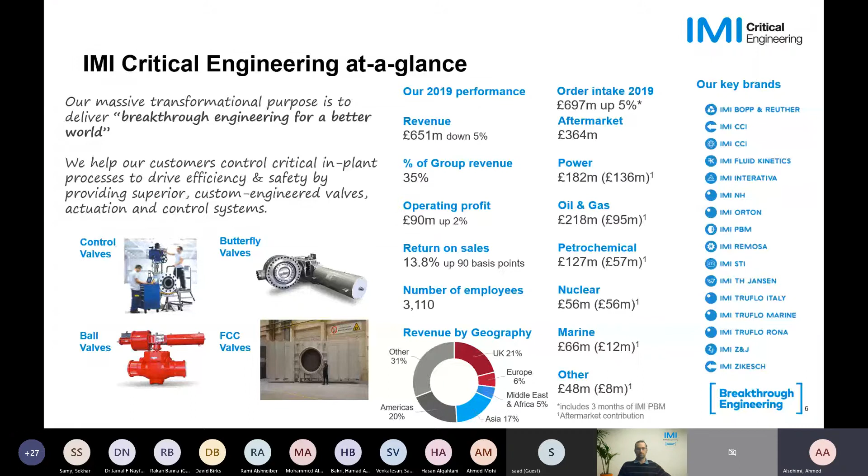Our branding, our key branding - we have listed our companies within the IMI group on the right hand of the screen: IMI Bopp & Reuther, IMI CCI, IMI Fluid Kinetics, IMI Orton, and so on. If you have any questions, we can answer them at the end of the session or after my presentation.

Time journey of the company. IMI is established in the 1800s with a history spanning the last century. IMI CCI joined the group in 1981. We continued acquiring some big players in the market - in 1997 we acquired Sulzer Valve Technology in control valve, also BTG in 2001.

Up until 2006, we were only in the control section. In 2006, we acquired IMI Orton, IMI Truflo, and IMI Truflo Marine, which is in the isolation business. We continued acquiring and expanding our portfolio to cover and support our customers around the globe.

Lately, we have our venture in Saudi. We established IMI Saudi Industry in 2020, this year, and the project is ongoing as planned.

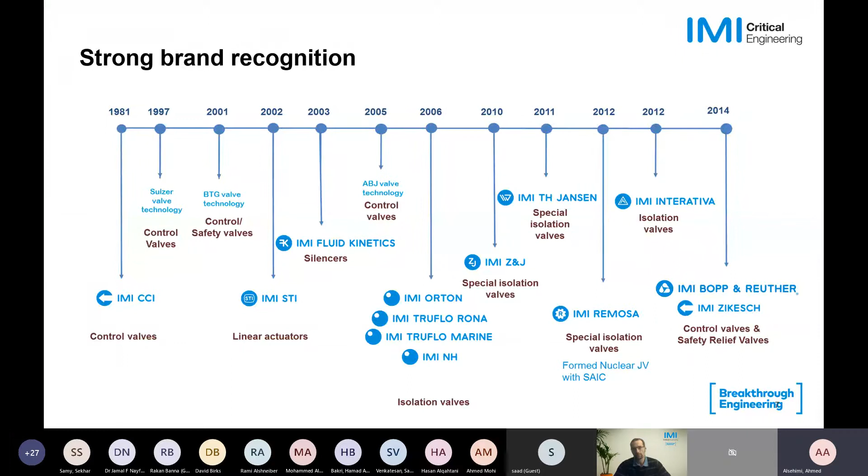In terms of our people and growth, we have what we call a doctor program, or valve doctor program, and in light of our vision, because our product is critical, we have this program to create subject matter experts to support our customers and solve problems.

We also have a growth accelerator program designed to fast track growth within our division, putting our talented colleagues at the heart of our business challenges. IMI is also taking the initiative in inclusion and diversity among our 3 divisions and in all positions.

Just a quick update on our venture in Saudi. We have planned to have a 20-ton lifting capacity in our plant in Saudi. To support our customers, we need to invest in high tech, so our factory will be able to handle 20-ton valves.

We also target up to 56-inch size. We will also be having API 6D and 6A certification. The plan is to have this facility ready by early next year.

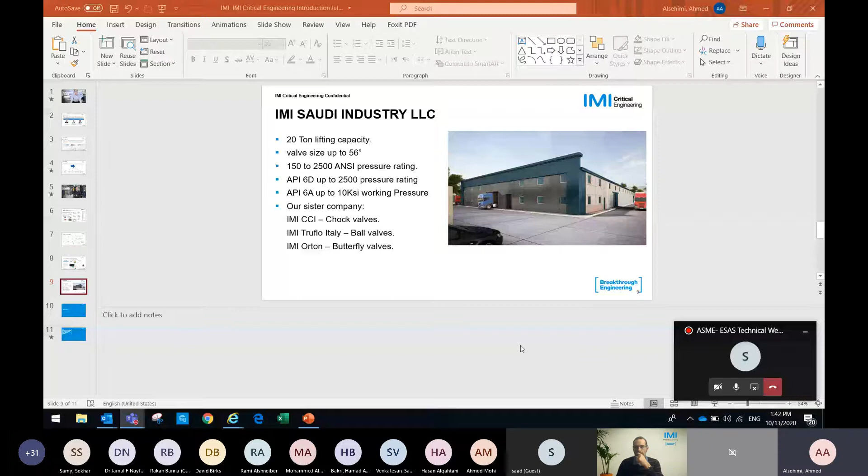Yes, no, we hear you clearly. Thank you very much, we appreciate this brief introductory about IMI.

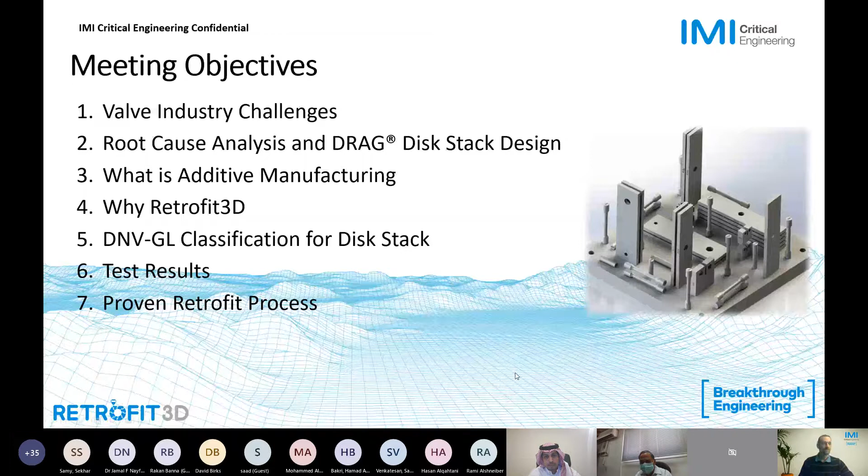And I will let Sekhar Samy introduce himself when he will take over his part of the presentation, but we'll jump right into the most exciting topic, which is control valves.

So you might be familiar with control valves, you might not be familiar with control valves, but whenever you go to a plant, you see either an insulated pipe or not an insulated pipe, and then you see a valve body in that pipeline, and you see a yoke and an actuator sticking out of that pipeline. That's what you see when you look from an external perspective.

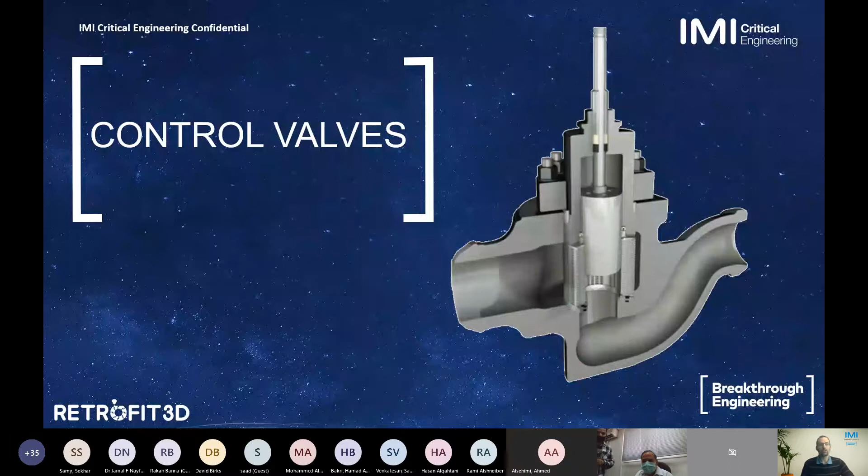But when you look at the details and you go into the valve, you see the trim in the valve that is actually doing the work. So you see a cage here on the left side picture, and on the bottom of that cage you have a seat ring and you have a plug that moves up and down, controlling the flow that you want to let down through that valve.

Now, there are many different types of valves, many different types of trim designs available in the market for different applications. It could be a single stage where you just have the cage here and you see the seat ring on the bottom of the cage, and the plug that comes down and seats at the seat right here. So you can have a design like this, or you can have multi-stages where you have not just one stage, but multiple stages in series, like this picture as an example -- a multi-stage, multi-path trim installed in a control valve.

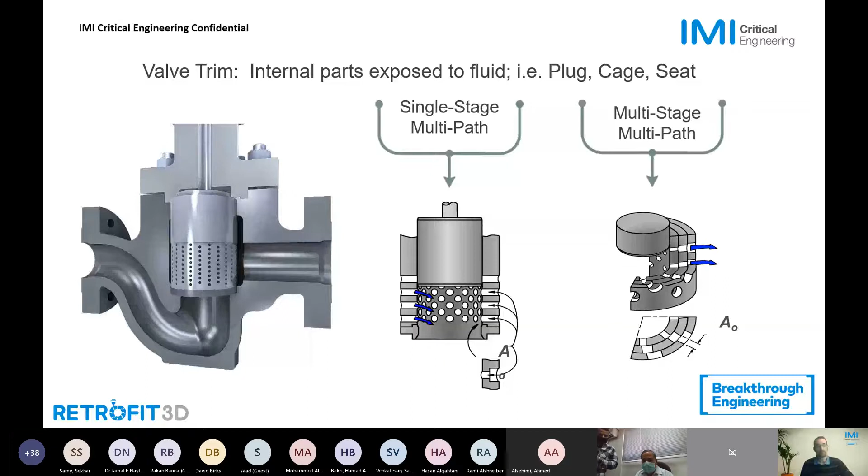Again, there are many different types of valve designs and valve trims, and some of the challenges that we see in the field with certain applications and valve designs is like this. Cavitation is a good example here.

And when you look at the right hand picture here, you see these damage mechanisms, they look like a crater, right? They look like the moon, and this is really from the imploding bubbles that release a very high pressure jet and impact that material right there. And there is actually no material that can really withstand cavitation. So our focus is more to eliminate cavitation, because there is just no real solution from a material perspective.

So this picture, I actually like this picture quite a bit because you see the damage mechanisms on several different holes here. So when you look at all these, you see those damages taking place, but you don't see them in between. So the question remains, why do we see cavitation taking place at some areas, and on some other areas you don't see any damages taking place?

The answer is actually pretty simple. Cavitation is not an exact science. Yes, we can calculate that cavitation takes place, yes, we understand the physics behind it, but it's not clear where exactly cavitation is going to take place. So some people try to control cavitation, but it's hard to control something that you cannot predict 100%. So we take more the approach to say, well, we know cavitation is going to take place, so what can we do to eliminate those cavitation related impacts?

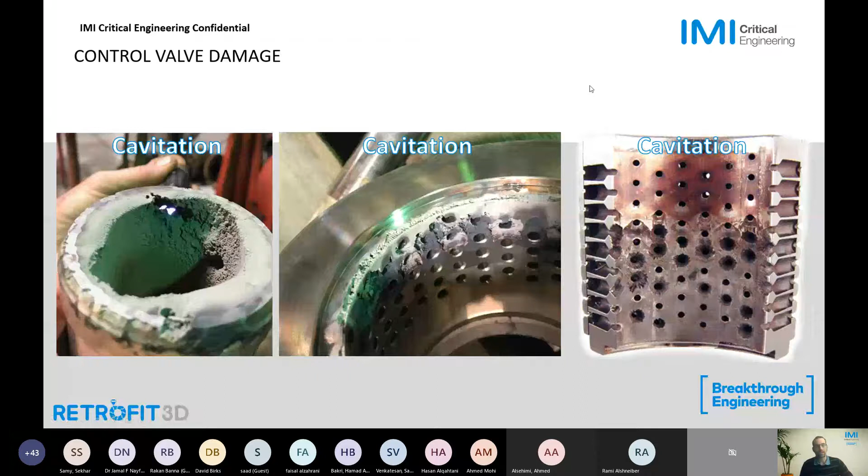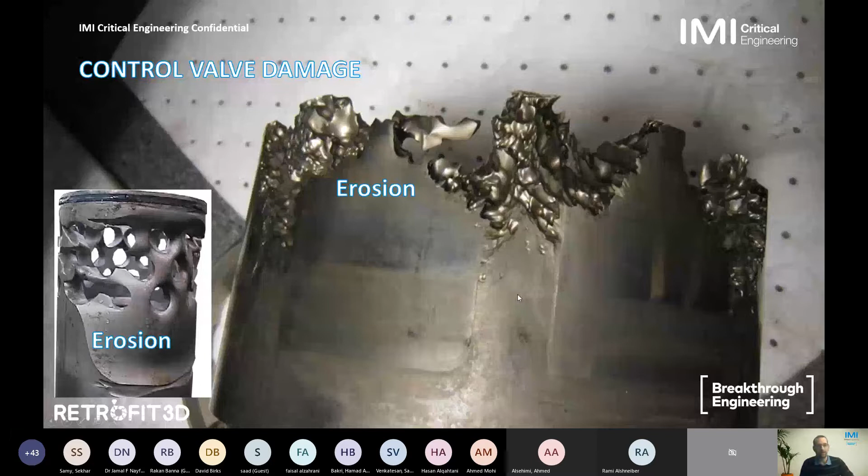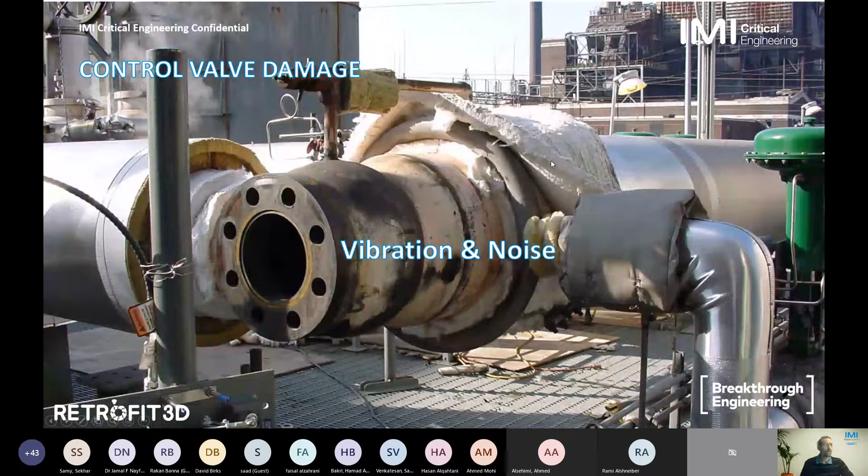So we're taking a step back and asking ourselves, why are all these damage mechanisms taking place, and what might be the root cause of them? When you really peel that onion and go into the details, you start to see that they all have one common denominator, which is fluid velocity. Fluid velocity is the root cause issue for all these challenges that you see in control valves.

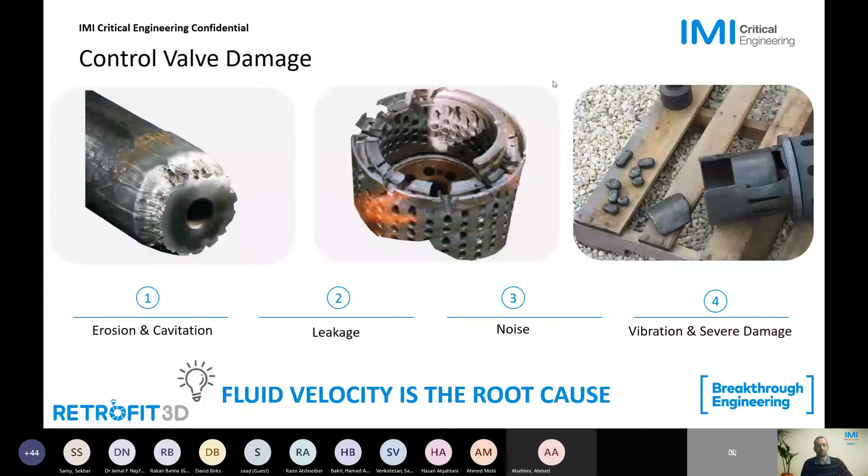So when you look at the math behind it, you see that, for example, the second bullet point here, erosion. Erosion damage is a function of velocity to the power of 2 to 4, depending on the medium. If you have liquid, it's to the power of 4. If you have more gas, it's to the power of 2. And the same with cavitation, it varies as a power of 4 to 7 of velocity. So just imagine if you can reduce that velocity by a certain amount, your impact to the overall system, to the valve and the system itself, is going to reduce to a much larger degree.

Obviously, the same goes for noise and vibration and corrosion as well. So there are many damage mechanisms that are directly associated with the fluid medium control velocity that is going through the valve. So maybe we have to talk a little bit more about the principle of velocity and how velocity is being generated in a control valve.

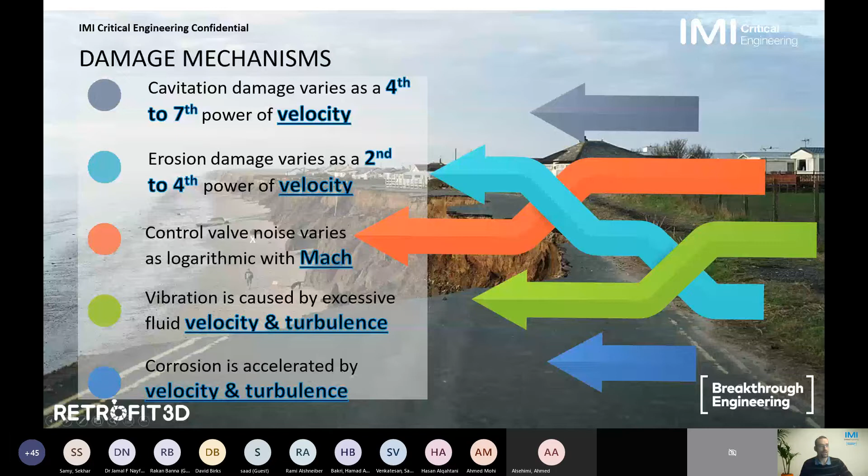So again, this picture, you saw this picture in the earlier slide here. You have the cage, the seat ring, and the plug that is moving up and down. At the inlet of any control valve, you have the upstream pressure, that is the system pressure being applied to the control valve. Then at the outlet of the valve, you have P2, the outlet pressure, which is determined by your required system pressure at your downstream system. So the control valve really doesn't define P2. The control valve will have to handle or dissipate that pressure drop from your inlet and outlet pressure without applying any damage to the overall trim and system.

So depending on the type of trim, here you just have a few holes, and those holes have a certain amount of area. If you calculate all these holes and area up, and you have a certain mass flow being pushed through the valve, you can calculate the velocity through that trim set. So really that's where we're focusing on, the velocities here at the trim exit, and then through the seat bore and right after the seat. Those are the velocity areas, or the core areas that we look into to make sure we understand what is actually happening in a control valve.

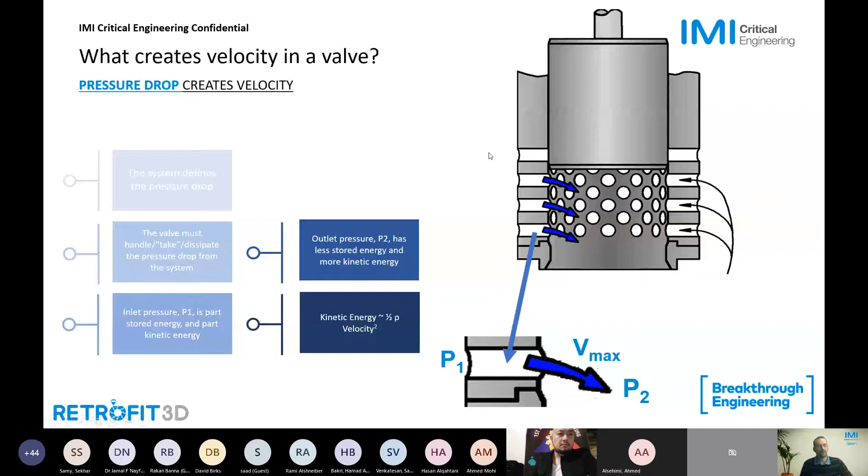And when you think of this upstream pressure, you can think of it like a waterfall. This is actually a beautiful picture of Niagara Falls in the United States, on the Canadian side. When you think of all this energy that is being pushed against that control valve, you can think of it as potential energy that is being transformed into kinetic energy and let down like a waterfall. Once it hits the ground, it will impact that ground, it will start to erode the bottom and create a lake below that waterfall. So how can we have the same velocity, or the same potential and kinetic energy, and let it down without creating that damage mechanism on the bottom? We can do this via step effect.

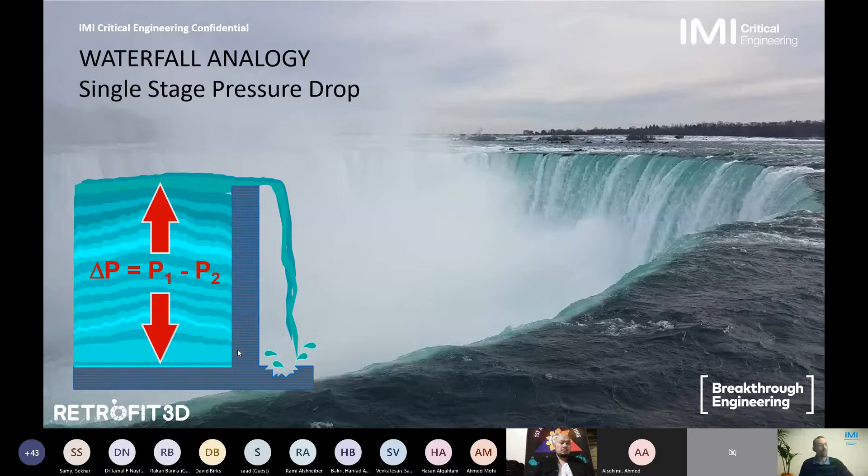So this is a picture of a fish ladder, where the fish could just jump upstream. You see here it's the same amount of energy being let down, but it's broken down in steps, and it will never reach those high velocities you'd see with a single stage drop over the cliff. You see the clear water on top, and how it starts to create eddies, and how the velocity slows down. It accelerates again, falls, and slows down again. So it never reaches those high velocities, and you won't see that damage mechanism.

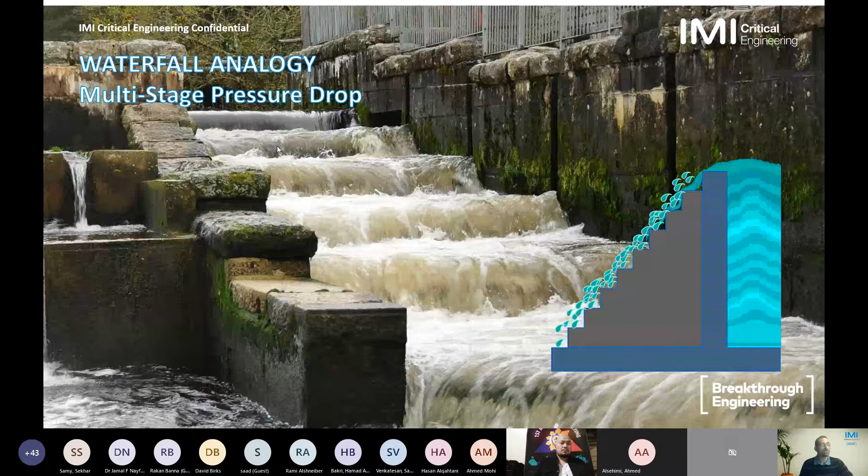So we might have to ask ourselves, what velocities are we talking about in control valves? What is a good velocity and what might not be a good velocity? When we look at different installations worldwide, we see quite a large range of velocities. If you've been involved in pipe design or pipe engineering, you're well aware of the very stringent requirements to keep pipe velocity very low. In liquid services, it's not uncommon to see 3 to 5 meters per second in pipelines. But we sometimes see in control valves between 100 and 165 meters per second. That is a very, very high velocity going through the valve, and you would never allow such velocities in your pipeline, because it would destroy your plant. So the question really is, what is a good guideline, or what should we adhere to?

The ISA has a very good guideline that we consider in our designs, which states that we should stay below 30 meters per second for liquid applications. In gas services, the velocities can be higher because the density is different. We always have to consider the density of the medium, so we can go with a higher velocity, but we more look at the kinetic energy, or the dynamic pressure. The ISA guideline states that we should stay below 70 psi of dynamic pressure. So these are the design criteria that we adhere to within the ISA guidelines.

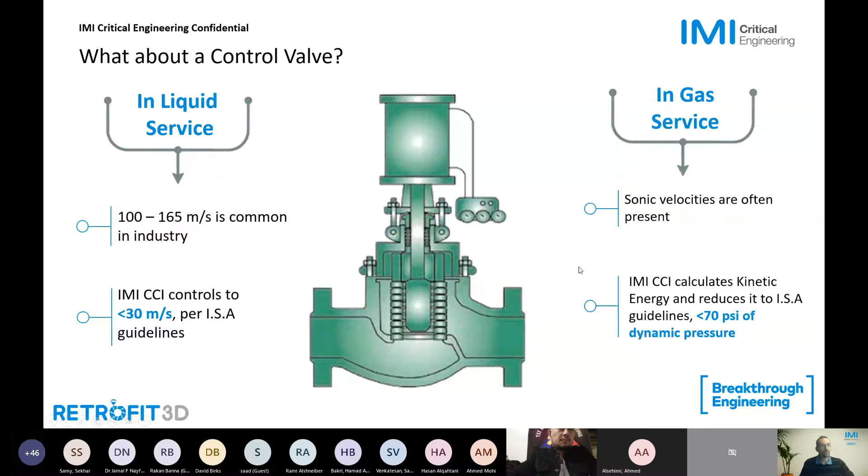If you've been involved in pipe design, you know that a 90-degree elbow in a pipeline takes the maximum amount of system pressure loss. So you certainly want to stay away from that if you can in pipe design, but within a control valve, you want to dissipate that energy, so you want to apply enough stages to kill that kinetic energy in a safe and effective way.

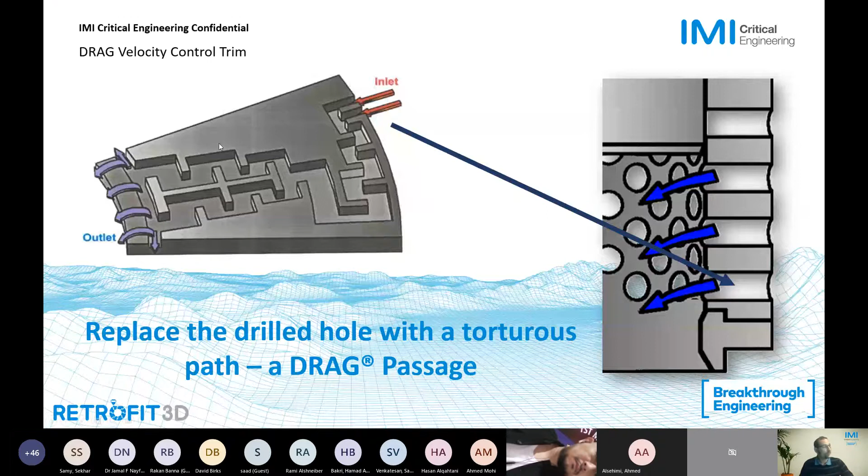There are many different designs available. You can do over the plug flow, meaning flow comes from the right side and goes over the plug, through the disc stack, through the seat, and then out. Or under the plug, where we come from the left side and go under the seat, under the disc stack, plug, and then out that way.

So we can flow in both directions, and we can characterize that disc stack to the specific application. Each layer can be designed according to the operating conditions and the application. This can be very powerful if you have different pressure drops as you operate your plant, where you could have 30 to 40 turns maybe on the bottom and fewer turns as you increase your flow. So this really helps to customize a system solution for your operation.

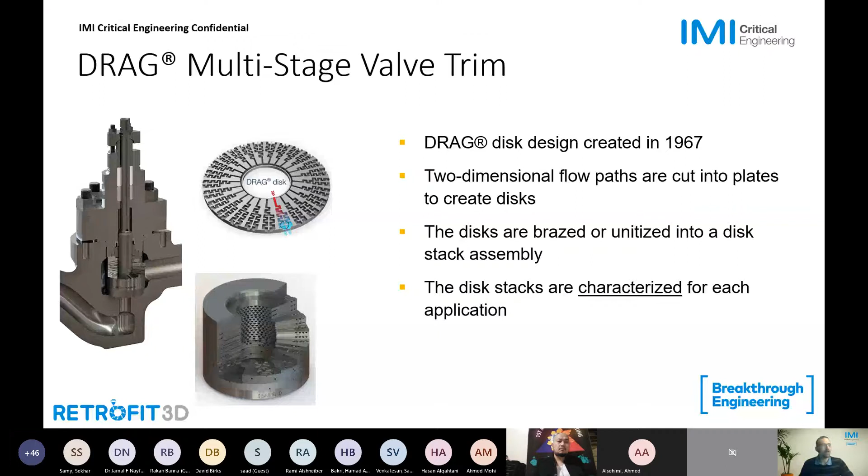Now, when you look at a control valve, and we've seen all these damaging mechanisms we want to address, I think we clearly established that the trim itself is where all these damage mechanisms take place. A valve body can be a challenge, and an actuator can have some challenges as well, but in most cases, the damage mechanisms take place right in the control valve, generated and impacted in the trim itself. So we're asking ourselves, how can we address all these issues? What if we could eliminate them all by just replacing the trim in the control valve? No need to address the valve body or actuator, just the trim itself.

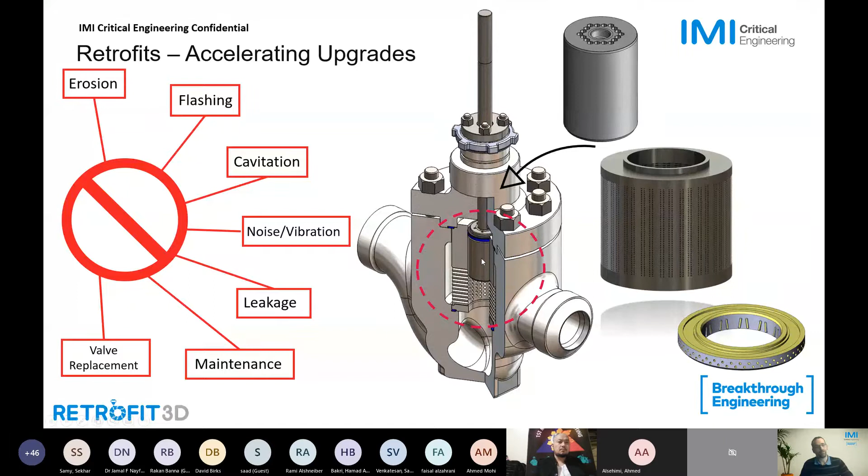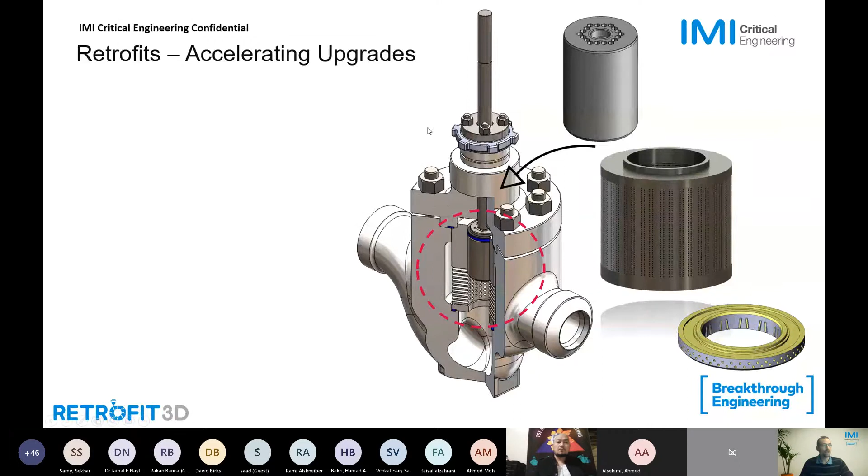If you have a welded valve, when you have to replace that complete valve, you will have to take it out of line and require a crane to do so. You might not need a crane if you just do maintenance in line. If you have a flanged valve, depending on the process, you might have to take it out of line, and a crane might be required as well. If you have a welded valve, you'd have to cut it out to replace it. If you have a flanged valve and the face-to-face dimensions change, you still have to do some pipe work, which can be associated with a high cost as well.

So if you just address the issues in the trim, you can eliminate any cutting, any welding, any NDE associated with the welding procedure, and post-weld heat treatment as well — all associated with a pretty high cost of installation. Such a solution addresses the root cause issue within the valve without considering the valve body or actuator for replacement, giving a direct cost benefit to the plant. This replacement of a valve trim is retrofit. You might have heard of that name. I want to make sure it's clear: a retrofit is not a replication of what's in the control valve. A retrofit is an upgrade with a highly engineered trim solution implemented into the same control valve.

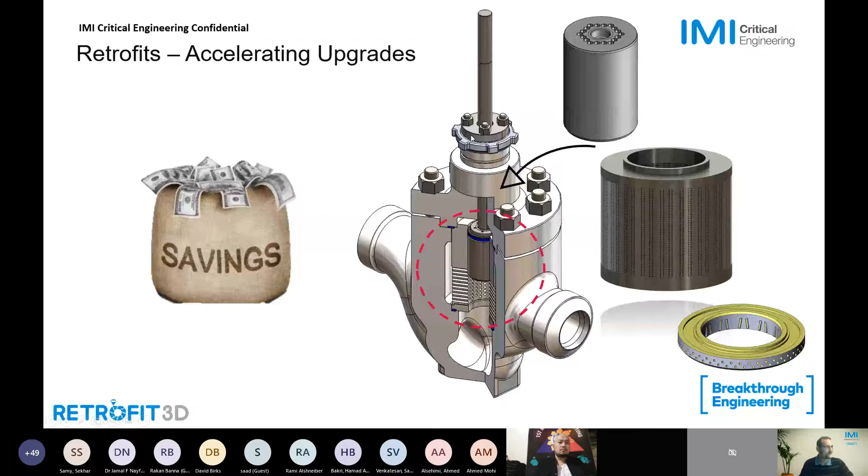We've been in the retrofit business for over 30 years. We've done many different retrofits in many applications around the globe. Here you see a traditionally manufactured disc stack, probably about 20 stages. If you have a cage with just a drilled hole, you don't need as much area to fit the holes. But with 20 stages, you need more metal or material to fit them. So in the past, we often had to look at the diameter and see if it would fit into a given control valve installed in your system. The same applies to the height — we sometimes required more stroke to accommodate system requirements, which often led to replacement of the bonnet and actuator as well. So you'd end up with just the valve body in line, which can be a good solution.

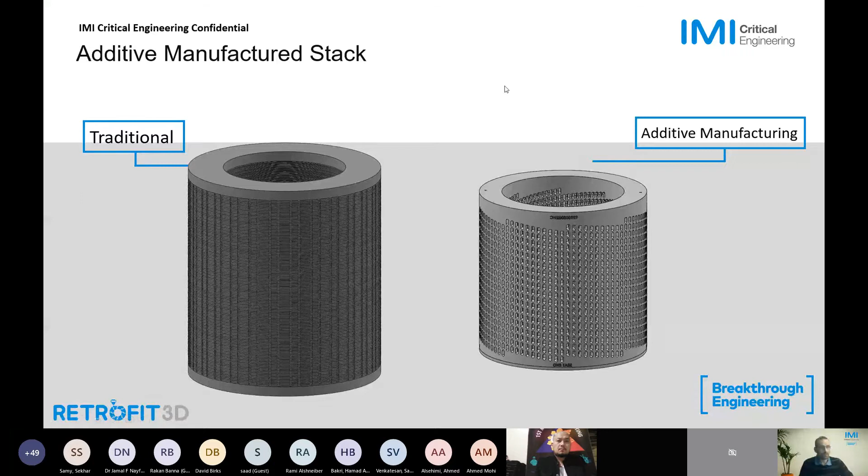But over time, we realized there are better solutions we can look into. This brings us to additive manufacturing. Additive manufacturing allows us to manufacture a disc stack equal or better to current disc stacks, but saving 40% in volume — meaning we can now design a solution that addresses the core issues and can be installed in any given cage-guided control valve without requiring changes to bonnets or actuators. This is a huge benefit, and additive manufacturing allowed us to do that.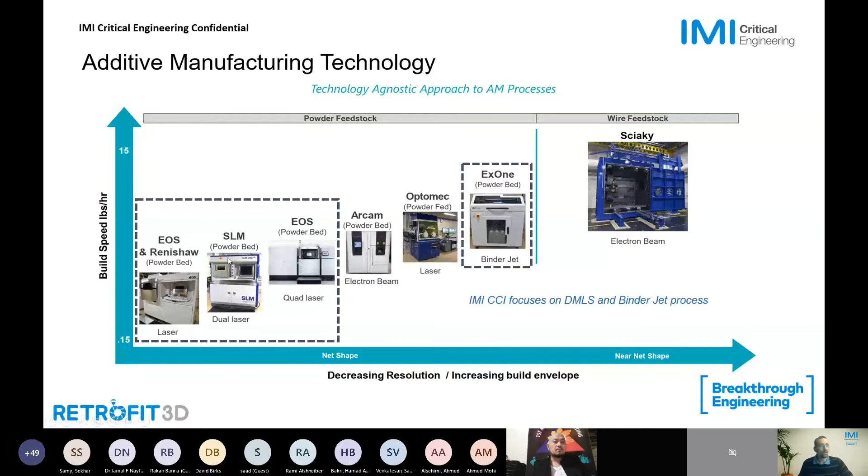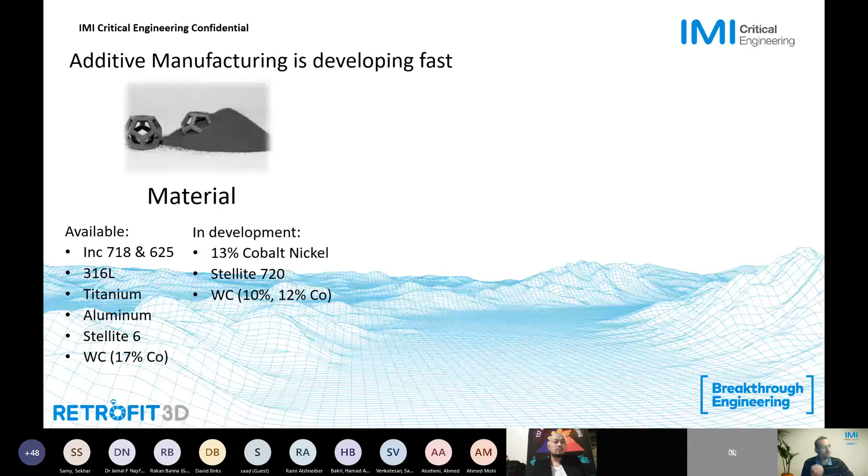From a material perspective, there are quite a few materials already available. Inconel 718 and 625 is available, 316 stainless steel materials are available, titanium, aluminum, and Stellite 6 is available. There's also a 17% cobalt tungsten carbide material available, but the higher performing grades are not yet available, they're still in development, and so is Stellite 720. So there's still a lot of development going on for additional materials in the marketplace, but there is a wide range already available.

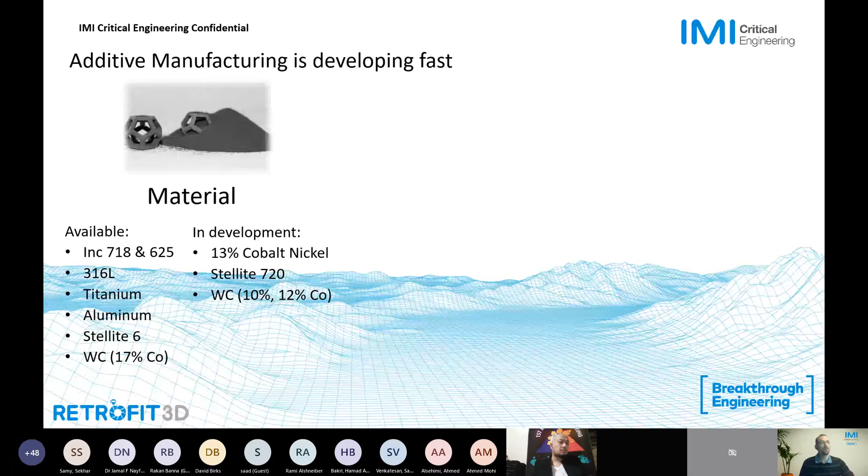The sizes and the speeds of the 3D printing machines are in very quick development as well. We are manufacturing up to 11 inches in size, but we are looking at going larger here up to 600 millimeters. So 290 millimeters is very common, and the 600 millimeters are in qualification. There are bigger and bigger machines coming into the marketplace.

We see two lasers to be the most common one. There are 4 lasers as well, which is in qualification with us as well.

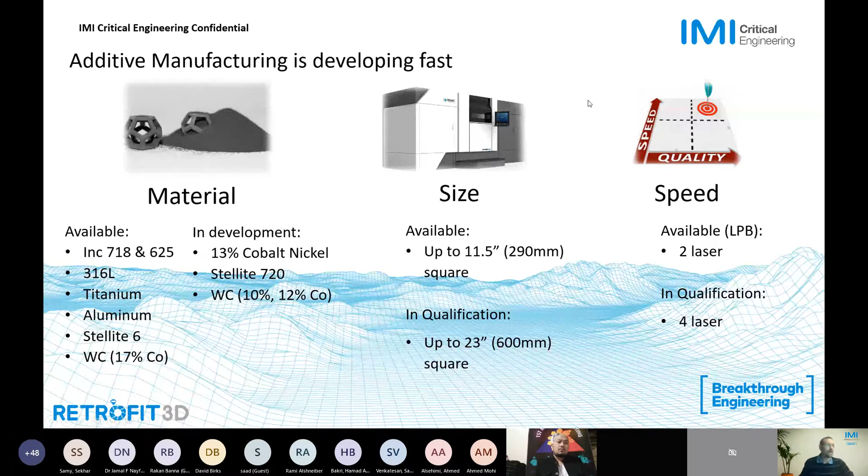And you might have seen some of the news in the medical field. The medical industry is utilizing additive manufacturing for printing skins, and also they're looking at printing organs as well. So quite an interesting development to follow.

And if you have a gas or a steam turbine in your plant, you might have seen the turbine blades being manufactured via additive manufacturing as well.

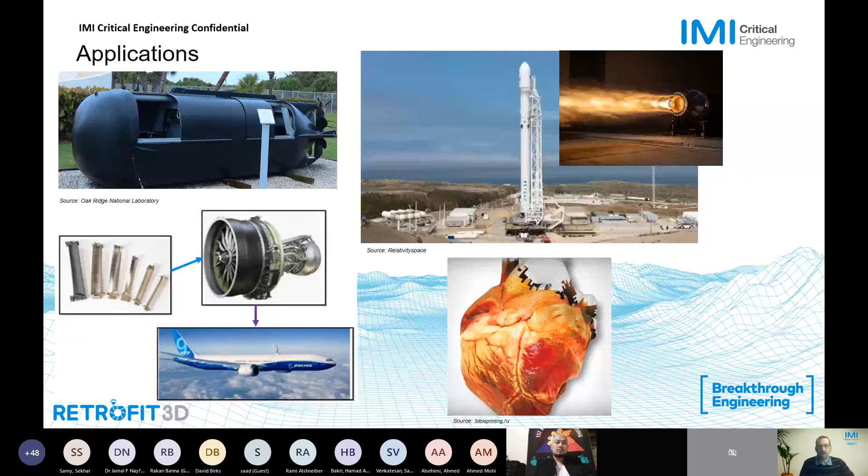And IMI is not new to additive manufacturing. It has been around for a while, and we actually started our additive manufacturing journey 12 years ago. We certainly learned a lot of lessons in the first few years, how to do it right to get the most benefit out of additive manufacturing. And we have quite a lot of installed base since the beginning of our journey with additive manufacturing, that's in the oil and gas and in the power sector.

So some of the benefits that we see by utilizing additive manufacturing is on the simplification and consolidation, right? Instead of having multiple parts, put them all together into one single item, that eliminates a lot of process steps and helps us on the lead time.

But one of the real huge benefits from a system perspective is on the increased accuracy, which allows us to have a higher turndown. And you might ask yourself, so why would that help a plant? What is the impact on a plant? I want to share with you a test that we did - this is a power plant in the Americas.

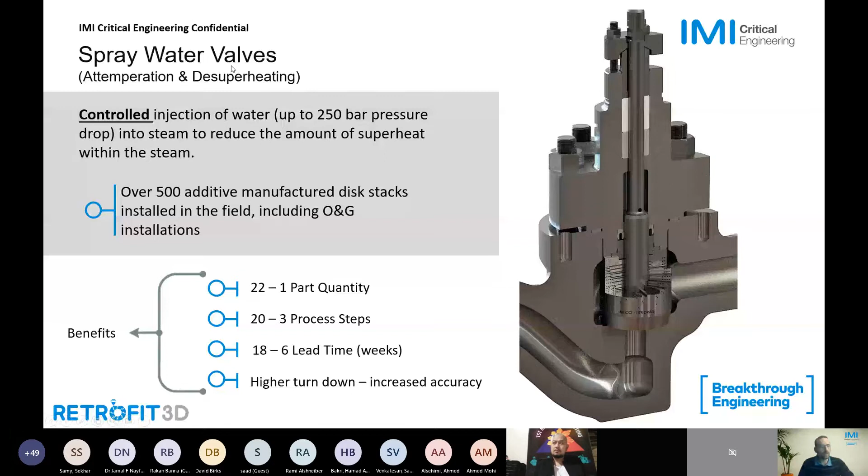Now you can imagine the benefit to this plant, where it did not only have a huge benefit to the overall material stress, the plant was able to increase the outlet temperature to the steam turbine and generate a bigger output with a higher revenue. So that's just one of the benefits we've seen by utilizing additive manufacturing.

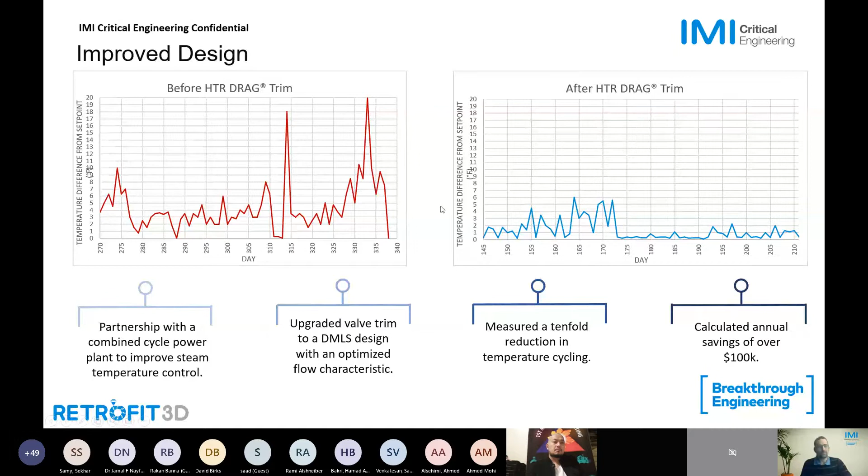So we approached this issue with a twofold solution. The first was, since this was a flanged valve, we were able to change the flow direction from under the plug flow to over the plug flow so that the bonnet is no longer negatively impacted.

So we eliminated the impact on the bonnet, protected the valve body from negative impact, and included up to 16 stages of drag in this trim to control velocity at any given stage in that control valve. That's just one way it can be addressed. We were also looking at the flow conditions and adjusting the capacities to make sure this plant sees the maximum benefits from the new trim.

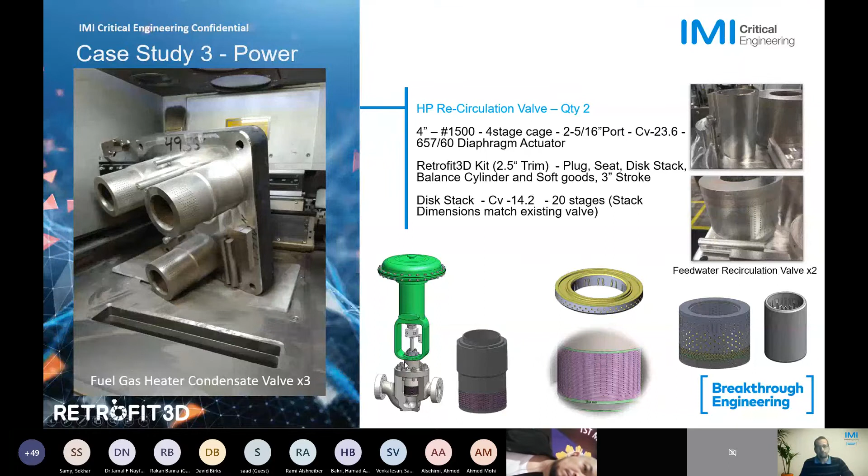So maybe before I hand it over to Sekhar or Samy, I want to show you another very unique study that we've done.

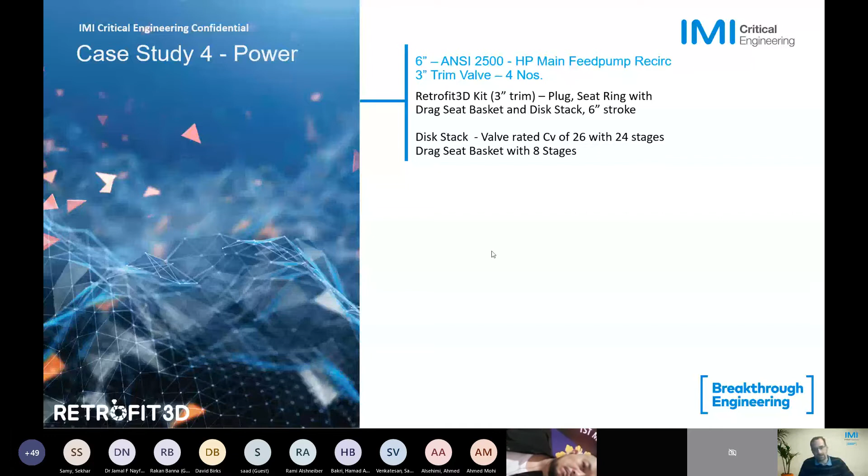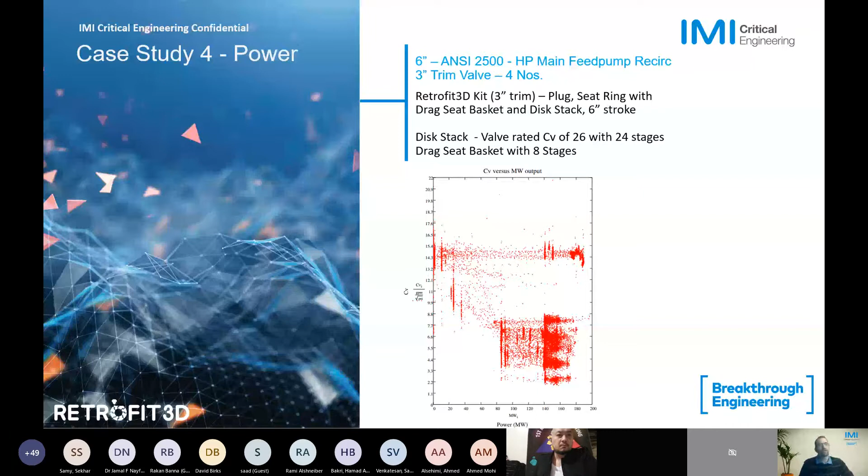This customer wasn't sure if the conditions on the data sheets are still accurate. So they sent us their DCS historian, the PI data, and we were able to look at 65,000 different operating cases and put it in a graph to visualize it a bit better for ourselves and the customer.

We were able to not only design a trim solution that includes a disc stack with 24 stages, but we then went another step and said, okay, we see this application will flash. Physics is physics, so this application will flash, but we have to protect the valve trim from the flashing impact, and therefore we wanted to add another stage of protection, which we did with a seat basket that included another 8 stages of drag. So it's a combination of the disc stack and then the seat basket. Altogether you have 32 stages in this solution.

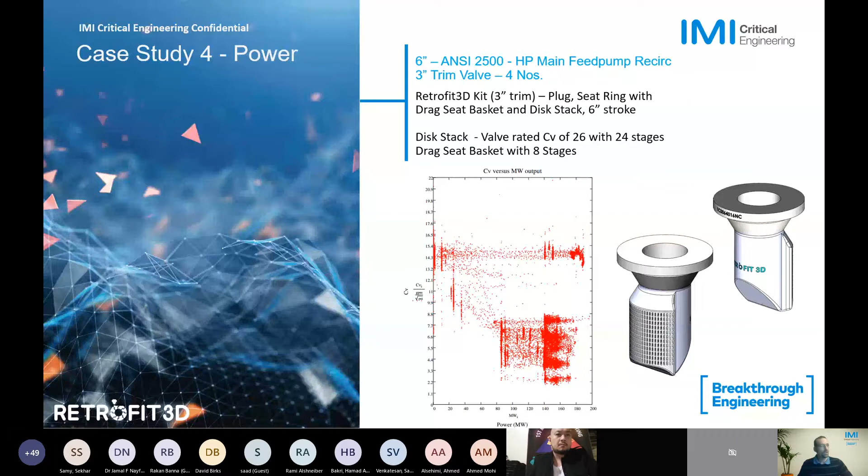And when you look at how this looks in real life, you see here the printed version of this drag seat basket. So that's just another very interesting case study, an interesting solution that we were able to work on with a customer of ours.

So there is an intermediate level called AMC2, which is something in between. It does not have much stress on it, yet it provides a good level of assurance of quality that you can use this part in an application. Let's go to the next one, please.

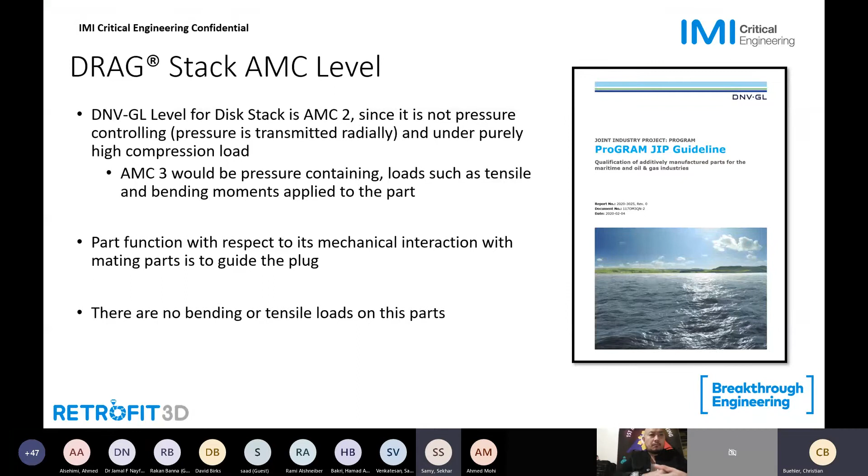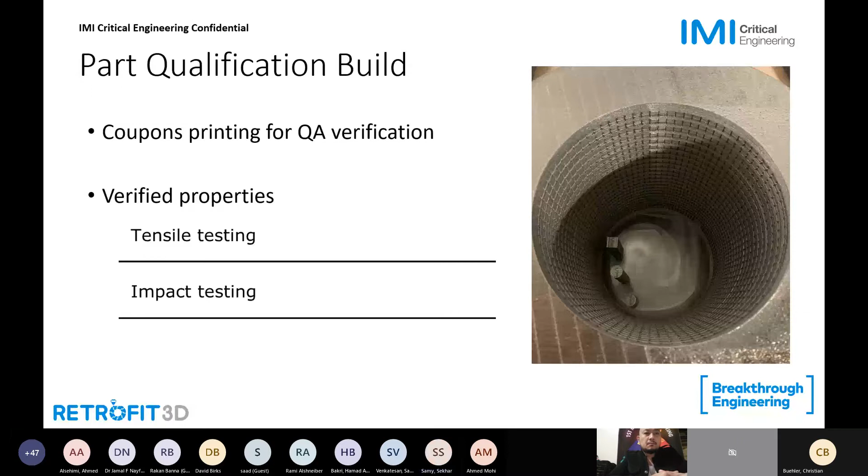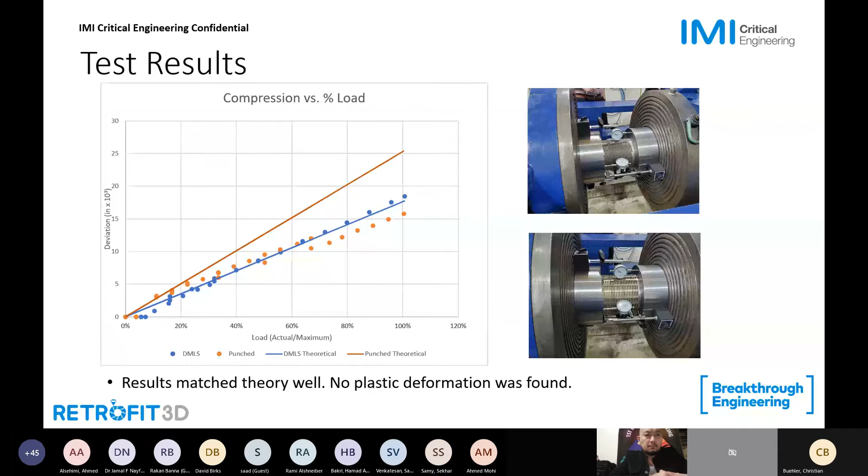Okay, so this is a very important test we did. We had 2 different machines with our vendor, and because there are a lot of dynamic applications we're looking at, we wanted to do a fatigue test. The bottom line on the left, a separate line all by itself, is the aerospace specification - Airbus's fatigue test. On top, these colored lines are from the 2 different machines we printed on, and we went through more than 1 million cycles for fatigue, looking at the alternating stress. We do see that if you print the 3D parts correctly and heat treat them well, you can get properties that are superior to wrought materials. Next slide.

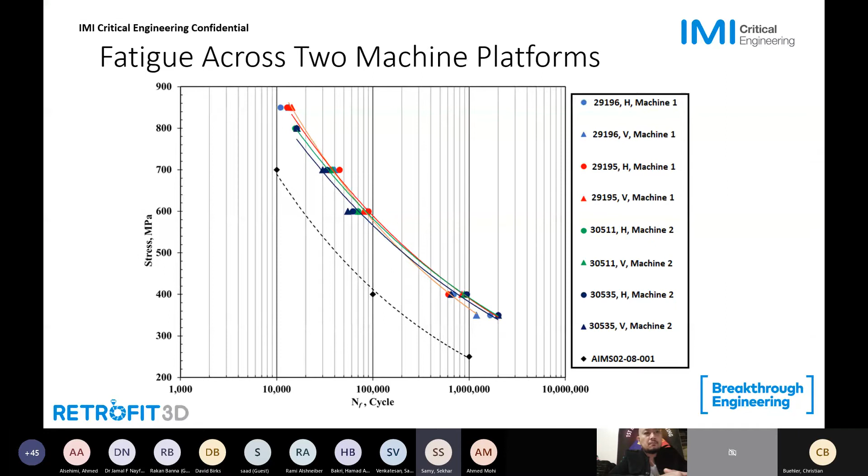Okay, this is another interesting test, let me give some background. When you 3D print parts with laser, the properties are not supposed to be uniform - there is some anisotropy when it comes to properties. So if you print a part horizontally versus vertically, you should see variations in tensile stress and yield stress of those parts, and also when you print at 45 degrees, it's somewhere in between.

In this graph, the blue bars are the ultimate stress and the orange bars are the yield stress. The 2 horizontal lines on top - the gray one is for the actual yield stress per aerospace material spec 5664, and the ultimate stress is shown with a black line. You can see that when you print this correctly with the right parameters, you can meet and exceed any of the material specs out there. Most of the heat treat for Inconel material, which is what this one is, comes from the AMS spec. Next slide.

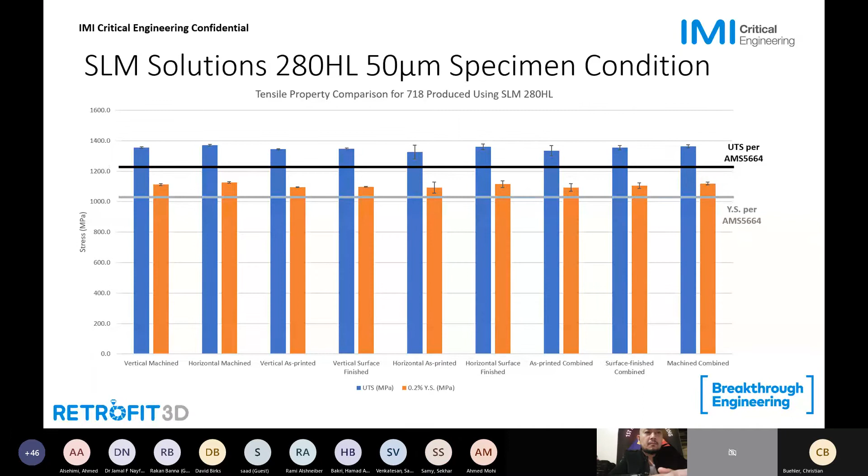Okay, here's typical additive manufacturing data over many tests we've done. The tensile strength is normally 1241, and this is around 1240, so very close. The yield stress is slightly higher, about 1200 megapascals compared to 1034. The elongation is extremely good, about 27%. The hardness, which is a function of further heat treat you can do, is greater than 30. The surface roughness also differs depending on how you print it - if you're printing a roof, you get slightly higher surface finish, about 19 micrometers, and if it's vertical, you get about 6.3. Next slide.

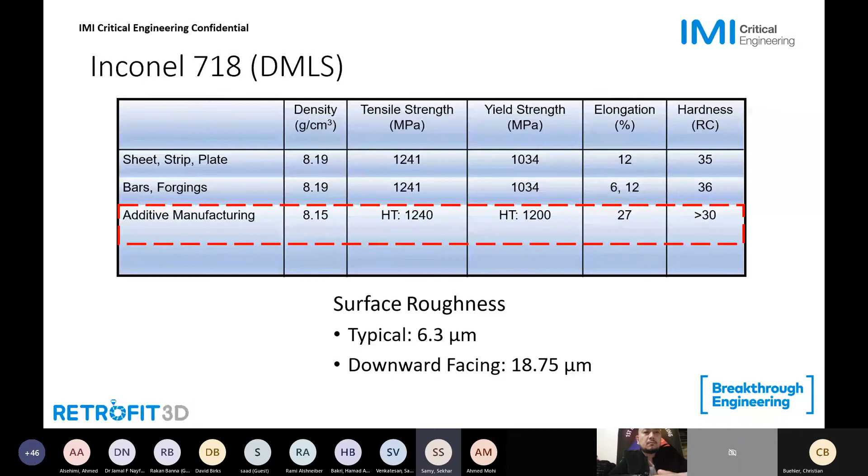Okay, so the retrofit process—we have done a lot of retrofits like Christian had shown in his presentation, but we do go through a mental list and we write this down when we are talking with you about retrofitting a particular valve in your plant. A lot of times, obviously, when you're coming and asking us to retrofit a valve, it is an issue and it's probably an important valve in your plant. So we need to understand how our retrofit will affect your plant, if any, or improve the performance of your plant as required.

We want to know—Christian did show you some of the properties and data that we get from you, and we analyze that data.

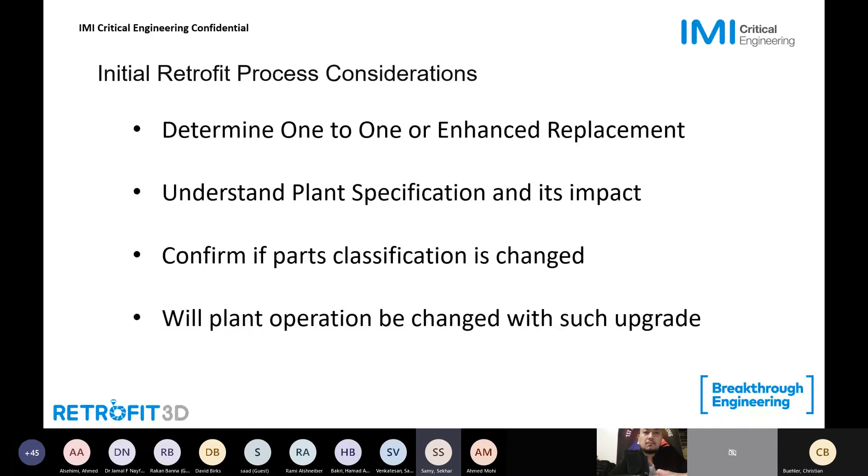So there's an 8-step process, which I'm going to go through in the subsequent slides, but you can see right here that we start off by reviewing the existing valve. We review the data sheets that you have for the existing valve, but we also go back and review the DCS data, which actually tells a lot of the story. What we have found is that how the valve was designed with the 3 or 4 service conditions versus your DCS data—that actually shows how it is being used in the plant—reveals a lot of what we see. Very rarely do we see that those 3 conditions are representative of exactly how we are using the current valve in the plant. And then we also go through measurement of the parts and the installation of the parts and the quality aspects.

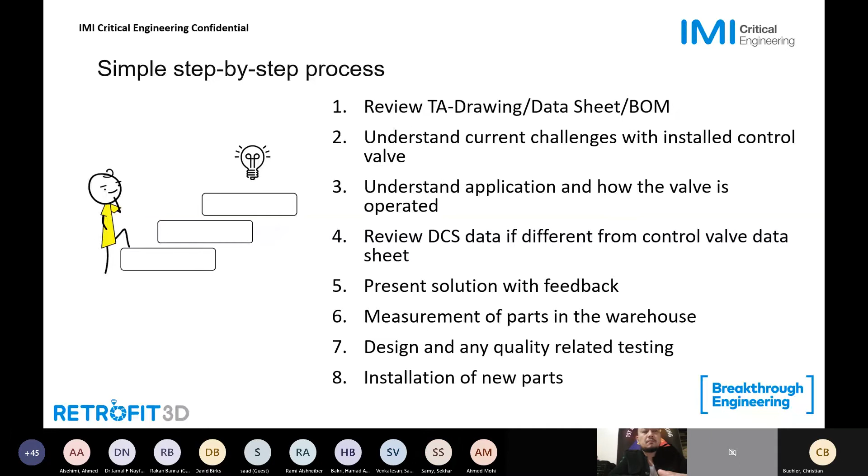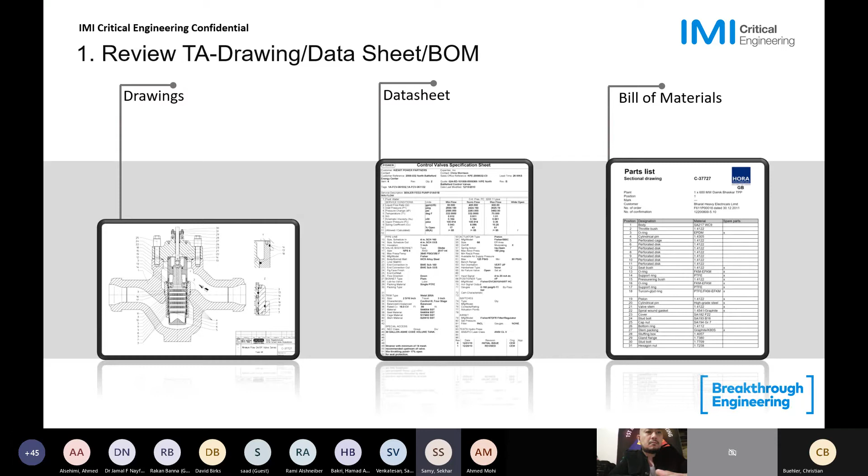So here you can see, we typically get the drawings from you, the data sheet from you, and also the parts list, because that also tells us a little bit about which parts from the drawing we need to replace and what they are actually called. A lot of times we are making parts that mate with existing parts that you have in the plant on the current valve, so we need to be aware of how that will impact things.

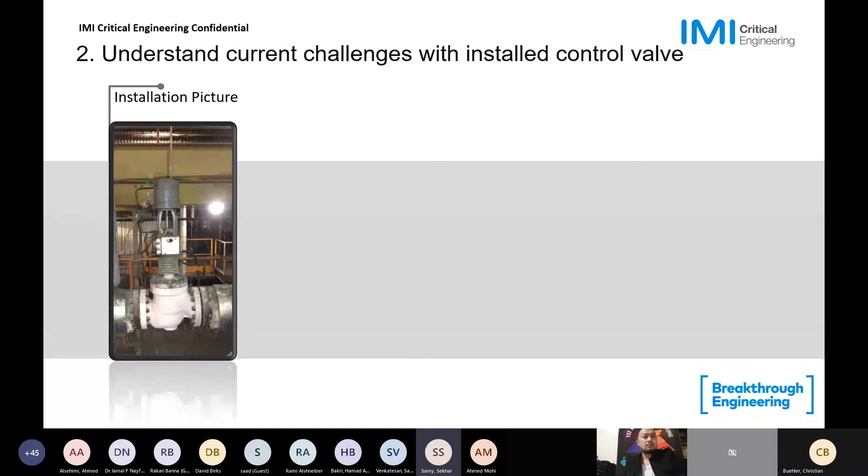So here is an installation picture. We generally get that information for informational purposes as to how it's installed in the plants. But more importantly, we actually look at the damaged parts. You can send us a picture of that with what kind of damage is there. And sometimes when you have fractures, we would request that you send us some pictures zoomed in, so that we can actually look at the structure of the failure and understand a lot about how it failed.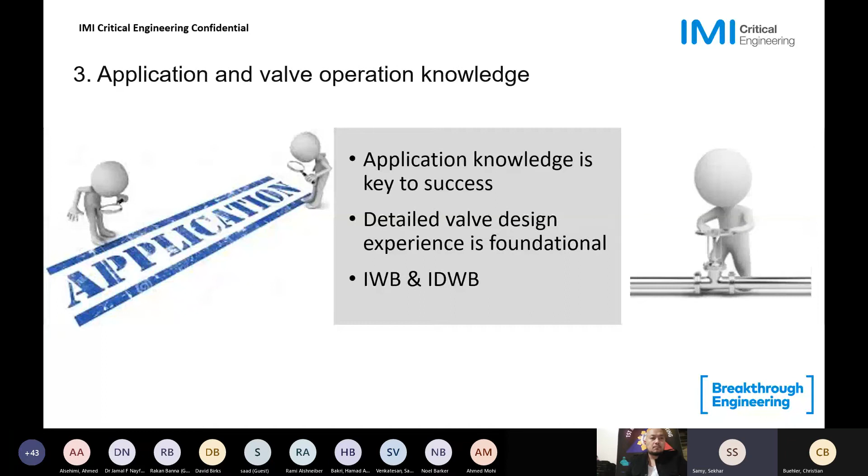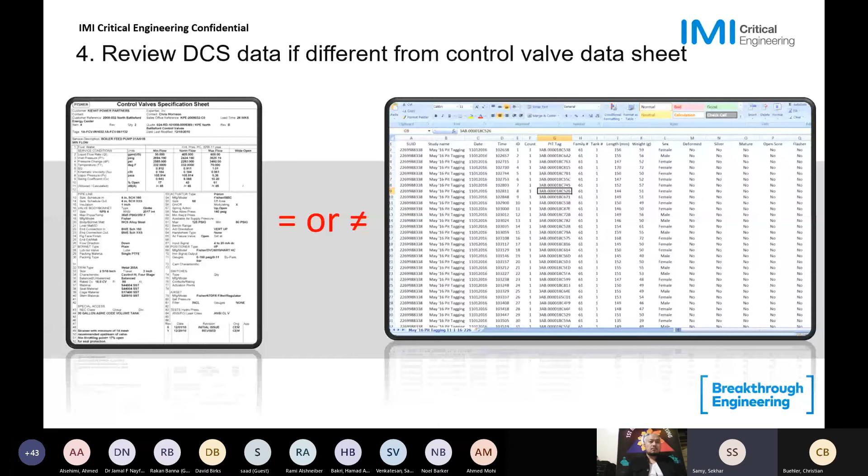So we talked a little bit about reviewing the DCS data. On the right side, you can see the DCS data is extremely important, and typically what they do is send us the upstream, downstream pressures, the flow rates, the temperatures, and the valve position of the current valve. Using that information, we can plot—you can send us tens of thousands of data points—and we have a program that actually takes that and plots the data, does calculations for us in many different ways, which helps us understand how this is used. We also request that you have a timestamp in there so we know how long a valve dwells in that particular position.

Once we have that information, we analyze it and send you a proposal with feedback on what we think is the issue with the current valve and what the solution should be. We want your feedback on the proposed solution - are there any other concerns, or issues we haven't considered? This is the time for a feedback session so we can tweak our solution to meet your needs.

The next step is to measure the existing parts. Remember, we are trying to replace only the trim parts so that all other parts in your valve can be kept the same - just 3-4 trim parts. We don't want to change or machine anything else in your existing valve. We want to keep all the actuation and everything exactly the way it is.

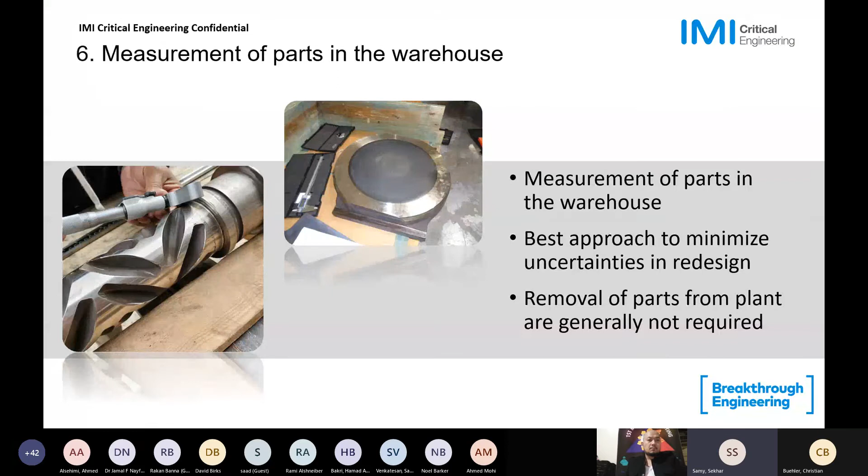To do that, we take the existing parts. If we have them in your warehouse, we can come there and measure them, or if you wish to measure them yourself, that's fine too. But typically we like to measure them because we know which are the critical surfaces and tolerances for these trim parts. We have domain knowledge that helps us measure them the right way, even stacking them in a particular way.

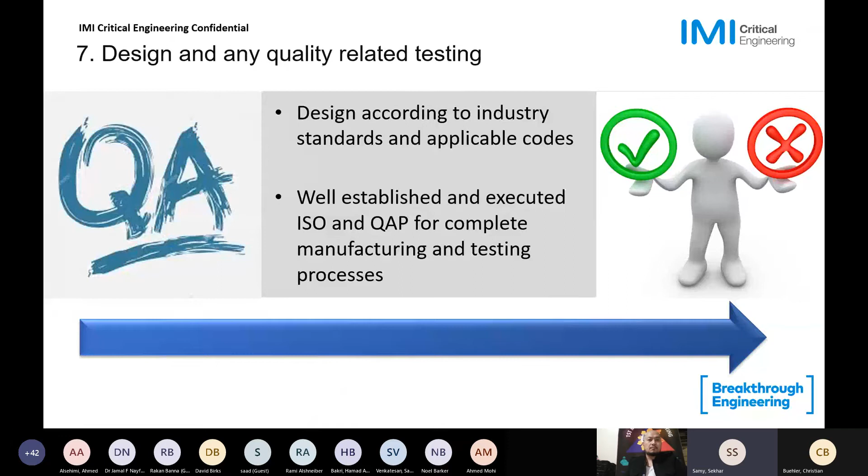We do not need you to send the parts to us - we can send somebody there. Then we talk to you about any special quality requirements or documentation you need, so we can collect all the data and send you the doc package. Internally, we have a stringent quality assurance program to ensure the parts we print are good based on test data, designed to industry standards and applicable codes.

Finally, the installation. In the factory, we stack up all these parts and do a complete dimensional check against the measurements to ensure there are no issues. Every kit we send you is independently stacked up, measured, and inspected.

We can have personnel come into the plant and show you how to put this together. For the first few retrofits on your plant valves, we can come in and do it, and as you gain experience, we can guide you remotely if necessary. Typically the parts are designed so you don't need any special tools or instructions - if you have a crew that understands how to put valves together, they should be able to assemble this.

Thank you very much for listening to this presentation. We are available, and we did see a lot of questions pop up. We have a retrofit website called retrofit3d.com, or you can scan the QR code shown. We also have our email address, and a local contact in Saudi who will interact with you and relay information to us. We work very quickly to come up with practical solutions for your problem.

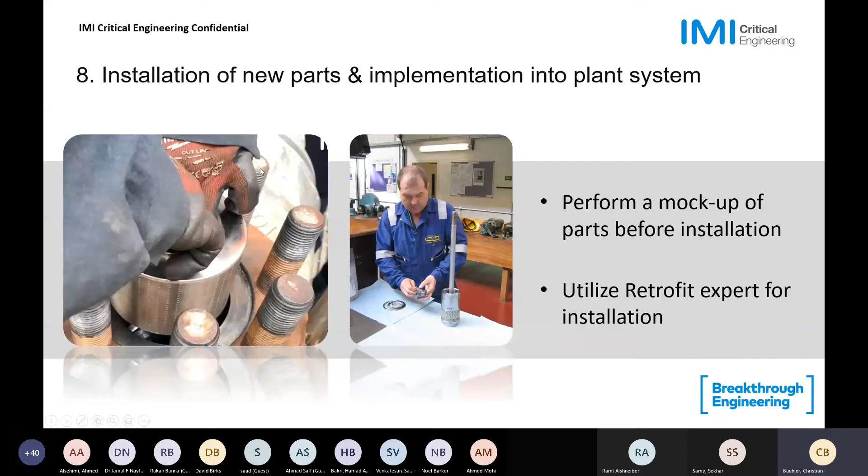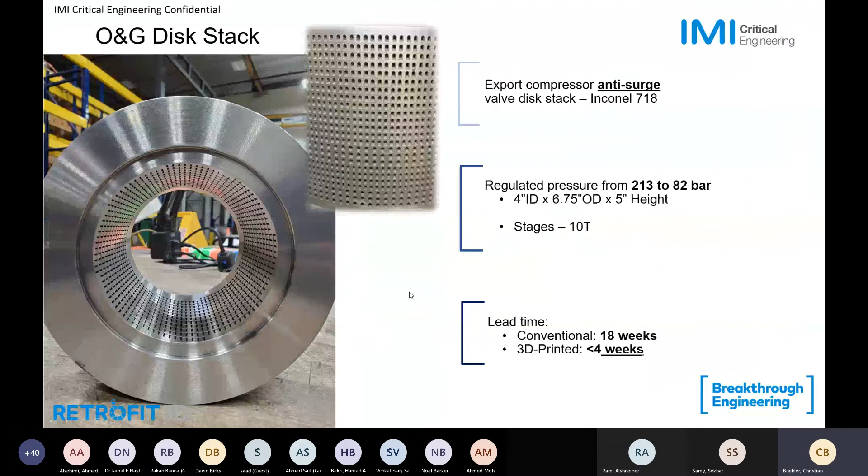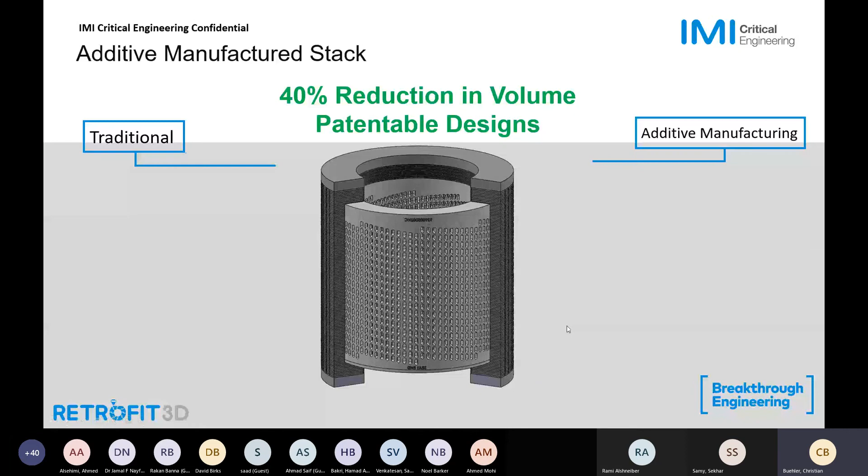Perfect. Maybe I can add to this, going back a few slides. Our control valves are installed in oil and gas applications like choke valves, where you have sand, rocks, water, oil and gases coming through at the same time. So we apply the same designs for those applications, and you can imagine there are quite large particles in there. I'd like to go back to one picture to show you how we protect the trim itself from clogging up.

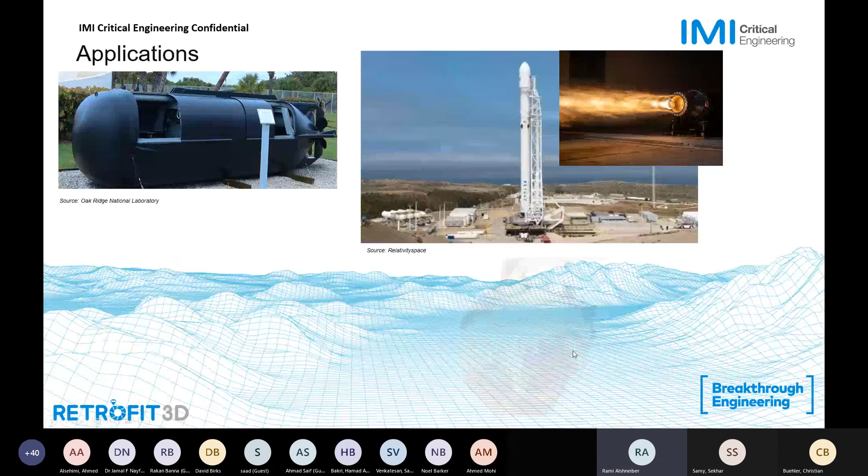I think I passed it. I don't see it right now, no, I didn't see it, Christian.

Yeah, so what I'd like to share with you, just to make sure you understand, is that our inlets on the disc stacks are the smallest area. So as you let the medium down throughout a trim, the area is only going to increase in size. Meaning anything that is passed through the inlet is going to be allowed to go through the trim without any problems. So we don't have any contractions within the trim itself.

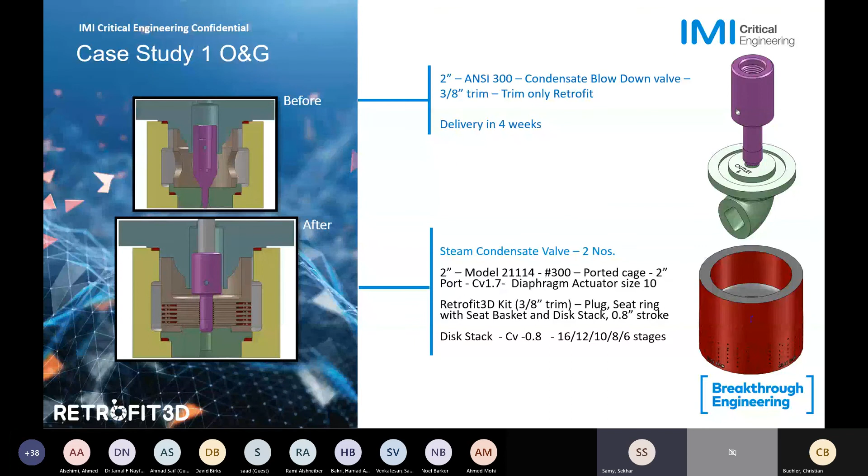And also, I think the question alluded to a wide rangeability requirement. With our designs, we can get much higher rangeability, because all you're doing is, as the plug moves, you're opening up discrete flow passages - so there's no loss of control. We get a much higher rangeability out of our valves. Typically, 100:1 is not a problem for us.

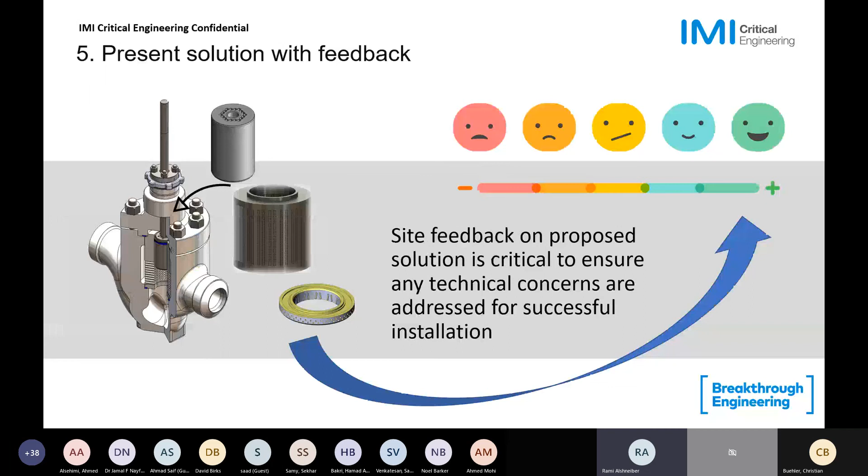Do you use CFD modeling and analysis in your design of retrofitting solutions? Yes, we do, but we also do flow tests. There's a reason why ISA or IEC specs do not allow you to just use CFD for CV tests, because CFD can get you close enough, but it's not 100% accurate. So what we've done is benchmark all of our designs using CFD, but then we also do flow tests to get the final numbers.

A final question quickly: what is our track record from additive manufacturing? We mentioned that we started that 12 years ago, so we have over 500 parts already installed in many different applications, and we see fantastic performance from any of those parts. We don't have any warranty claims on any of the additive manufacturing solutions we have installed.